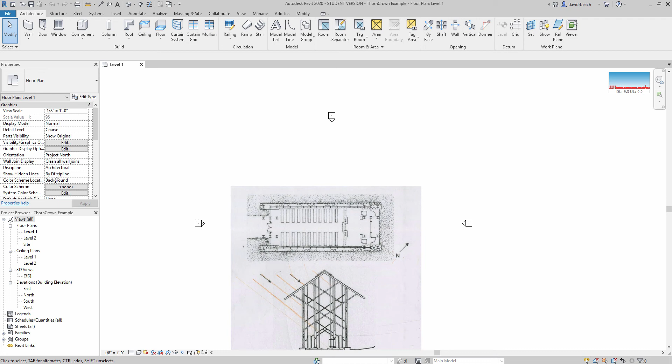Now that you have your floor plan in place inside of Revit and scaled correctly, let's start looking at some basic elements to do your virtual construction of your building model. Underneath the Architecture tab, the first few things you'll use quite a bit are walls, doors, and windows. Let's break those down first. We'll get into roofs, floors, and ceilings a little bit later.

As you're starting out in Revit, if we activate the wall tool, we want to keep things simple. Rather than using some of the more complex wall systems that have multiple layers, the beginning point for most of your projects should really be these generic wall types: 5-inch, 6-inch, 8-inch, and 12-inch. So let's drop this down to a generic 6-inch thick wall.

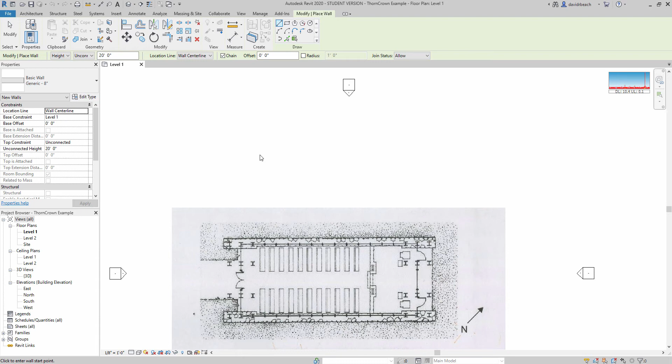The drawing process is pretty simple. Once the tool is activated, the ribbon changes based on what that wall is going to do. Pay attention to this row just underneath the ribbon, which shows basically how the wall is going to be drawn. We have a defined height.

The height is currently unconnected. In other words, it's going to be a 20-foot wall that's not connected to level 1 or level 2. It's going to be drawn on the bottom of level 1 — that's my work plane, essentially. It's going to be 20 feet tall.

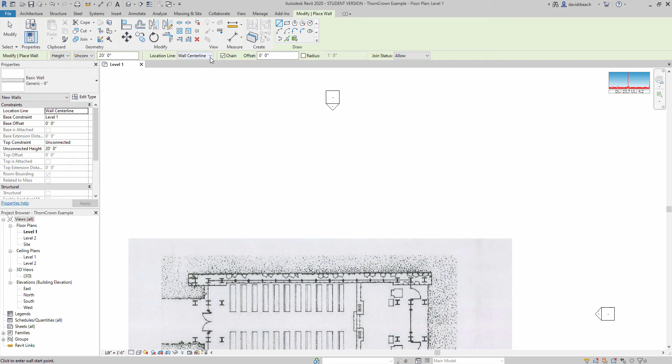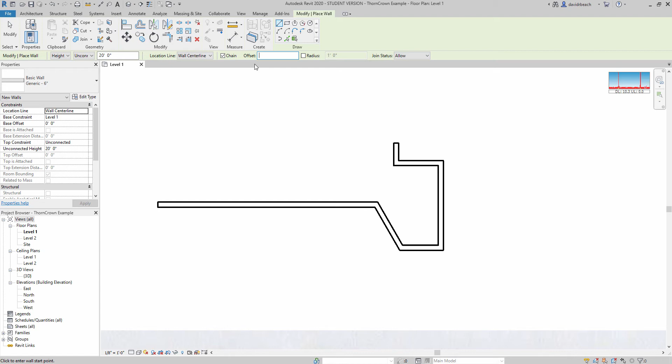Right now it's being drawn at the center line, meaning if I'm drawing a wall, I'm drawing about its center line. Next is chain, which means each time I draw a wall, the next piece is chained together, making one continuous wall. Next we have offset. I rarely use this, but the idea is I can put in a number, say 10 feet, and as I'm drawing a wall, it's actually going to draw it 10 feet off of where my current line is at.

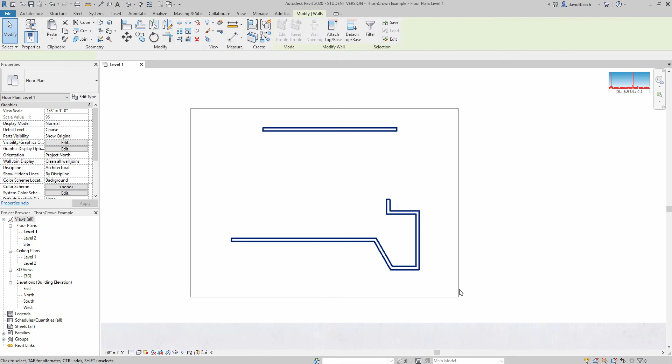Other important things to note: join status, radius — some of those things become useful as you move along. Let's just lasso and erase those, and go back into wall, generic wall.

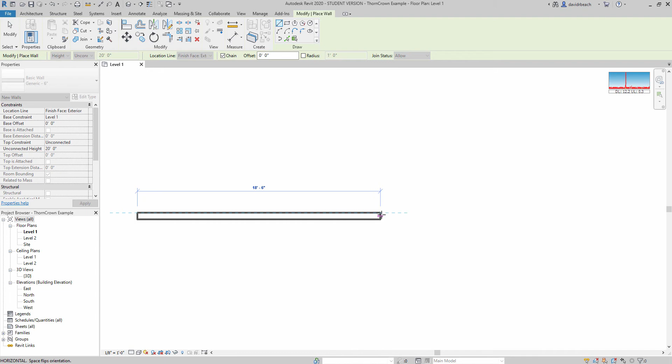Rather than drawing by the center line, I typically find it most useful to draw at the finish face exterior or interior. This draws at the outside edge as I'm putting my walls in place. This is more useful to me because I know a precise dimension on the outside rather than trying to do the math in my head and constantly divide something by 2 — reasonably easy with a 6-inch wall, but more complicated with more complex wall systems as you advance through Revit.

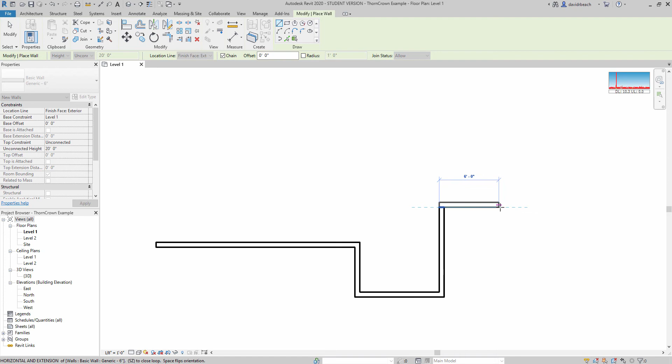As I'm drawing, you can also note that hitting the space bar is going to flip the side that the wall is being drawn at as you put things together.

Now, just like our line tools, as I'm starting to build with walls, I still have a lot of the drawing commands open for me. For instance, if I need to put these two walls together, I can do that by selecting the wall and dragging the grip, selecting this wall and dragging the grip until I get them close, or more precisely, together.

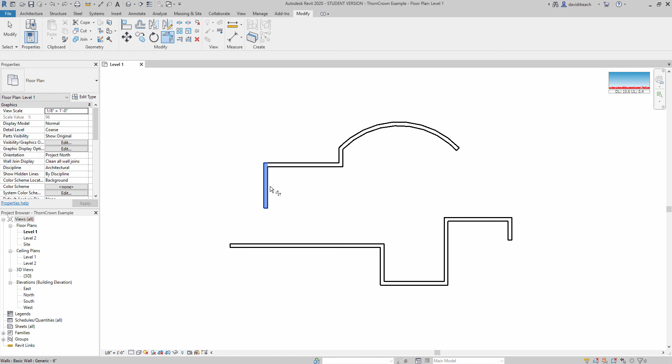Or a much faster way to do that is to use the trim command, underneath Modify. Trim, and then select the parts of the wall that you want to keep. That will start putting things together much, much faster as you begin to draw.

Next, as I'm building these walls, it is putting them together entirely in 3D. I have all of this information coming together. If you remember, these walls are 20 feet tall — that's how we drew them. And they are unconnected, meaning there's nothing attaching them to a specific point.

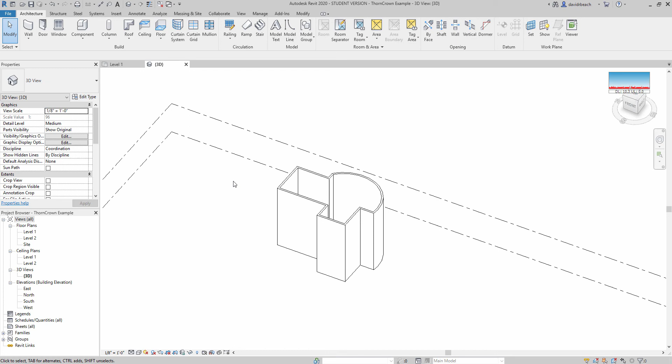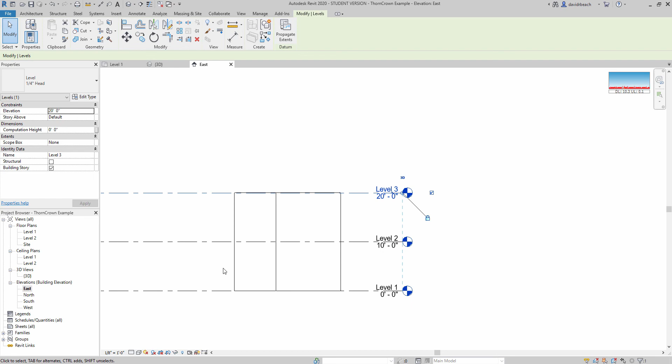As you improve in your Revit skills, one of the things you'll find you want to do is actually begin attaching these walls to a level. So for instance, if I'm doing a 3-level building, I'm going to copy this up, and now it's automatically going to name that level 3 for me because that's the logical step after level 2.

If I select these walls — that was just a left lasso across all of them — I can tell them I want them attached to level 2, in the base. Let's undo that. Oh, good grief. If I select these walls, the base constraint is set to level 1 — that's what I accidentally just changed.

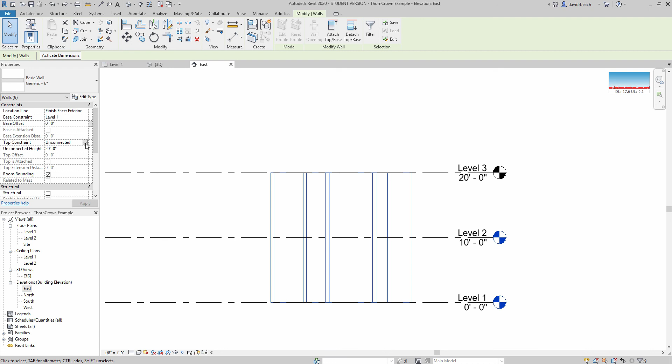The top constraint is currently unconnected, but I can place that at level 2. This gives me the opportunity so that anywhere level 2 happens to go to — if I set that to 12 feet, those walls are going to modify. In other words, they're stuck to level 2. So that becomes 12 and 24, meaning my finished floor heights are 12 feet apart.

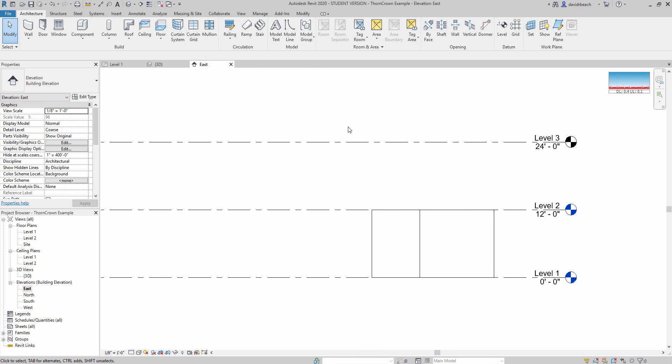I can continue to move those up and around, and I can change those at any time. Rather than connecting to level 2, I can tell them to connect to level 3, and those are going to flex and move based on what my model geometry is doing.